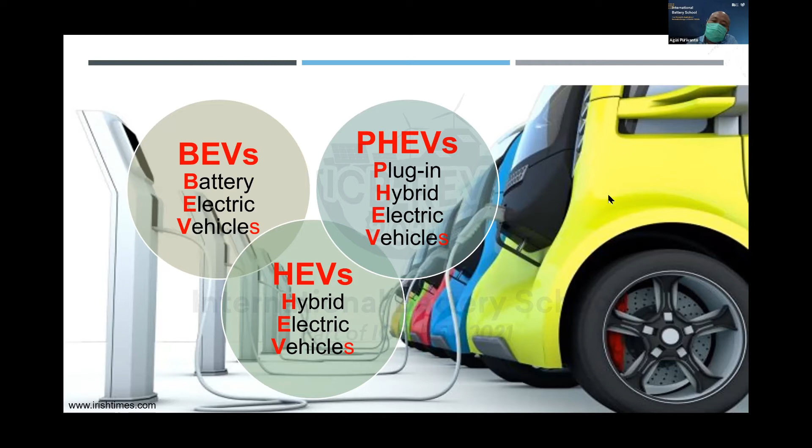So the battery is becoming more and more important in recent years. Batteries used in electric vehicles are not just one cell, but comprise many cells connected in series or parallel to the designated voltage and current, to provide energy used to move the electric vehicle.

Here I've shown the example of the BYD car, which uses lithium iron phosphate battery cells with a capacity of around 53 kilowatt hours. This 53 kilowatt hour lithium-ion battery, lithium iron phosphate pack, comprises many cells connected in series or parallel. In this system, it is divided into four modules, and each module is then connected in series to give the designed voltage.

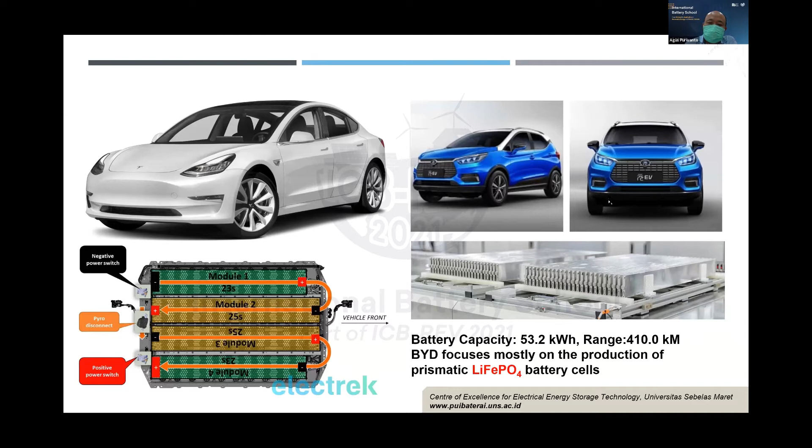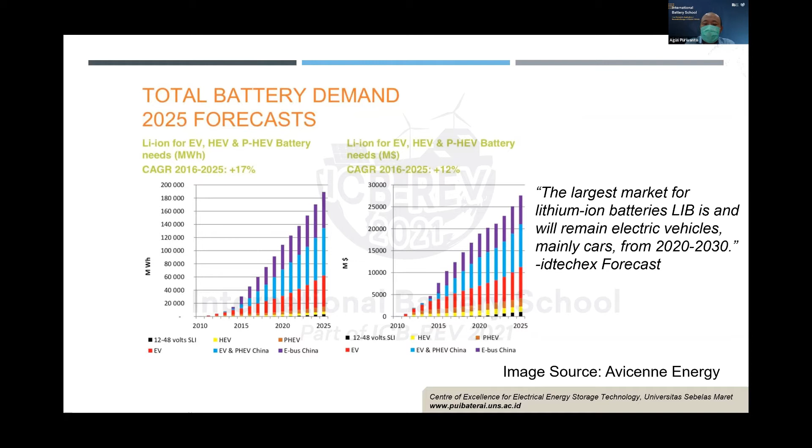As forecasted, the demand for electric vehicles is increasing year to year, and in 2025 the demand for batteries is predicted to be 180,000 megawatt hours, and it's forecasted that lithium-ion batteries will be mainly used in electric vehicles. So from this point of view, the knowledge of electric vehicles becomes more and more important in the coming years, because of the massive application of electric vehicles in our daily life.

So from the point of view of the manufacturing system, electric vehicle battery, lithium-ion battery comes from raw material mining. If we use NMC, the main minerals are nickel, manganese, and cobalt, and of course lithium itself. So from the material, it's produced into active material, and then becomes battery cell manufacturing. Then from battery cell manufacturing, it will be assembled into a battery pack.

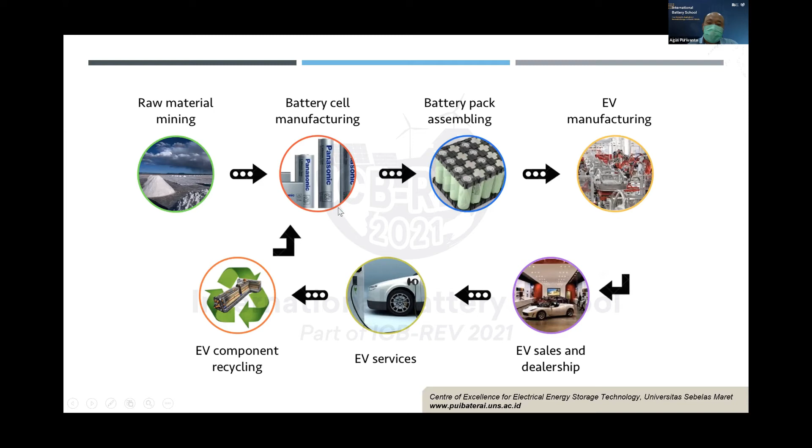And then from the battery pack, it comes to EV manufacturing, then continues to the sales, and also service and component recycling. My focus in this talk is battery cell manufacturing. Here, I would like to talk about active material processing, because to make a good cell or to produce a battery cell, it is better to create our own cathode material or our own active material.

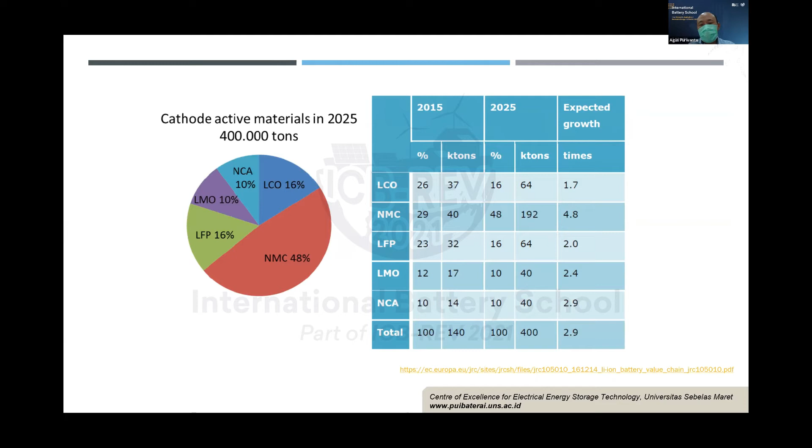Here, we found that the prediction of active material for 2025 is around 400,000 tons, which is mainly NMC material. So from the forecast, NMC material will be the dominant cathode material in the near future.

From the point of view of research relating to manufacturing, of course, we want to produce low cost lithium ion batteries. To make a low cost lithium ion battery, we must produce cells with the highest performance. It means for cell production, we must prepare cells with the highest energy storage capacity, or for another purpose, batteries with the highest power ability. So by making a high performance battery, the price per kilowatt hour of energy storage will be reduced.

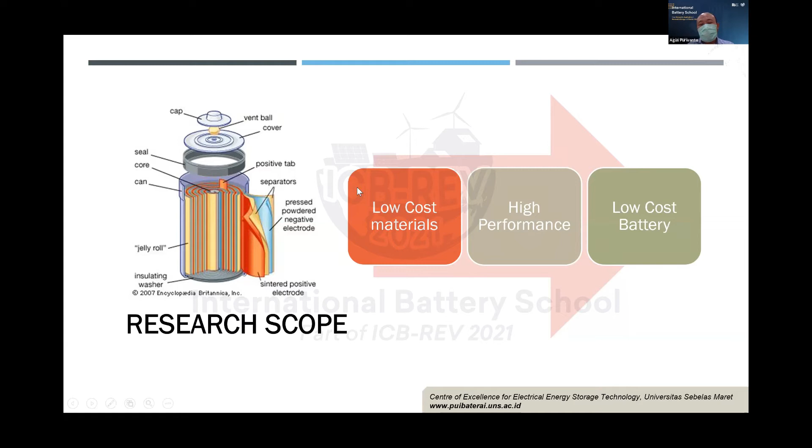Another strategy is to make low cost material, of course. Here I want to talk about the development of low cost active material. To make a low cost active material, it is better to use technical grade material. As researchers, we routinely make cathode material, but in our laboratory research we always use high purity chemicals. Of course, using high purity chemicals, the active material will have good performance and good characteristics. But from the industrial point of view, it is not feasible for commercial use.

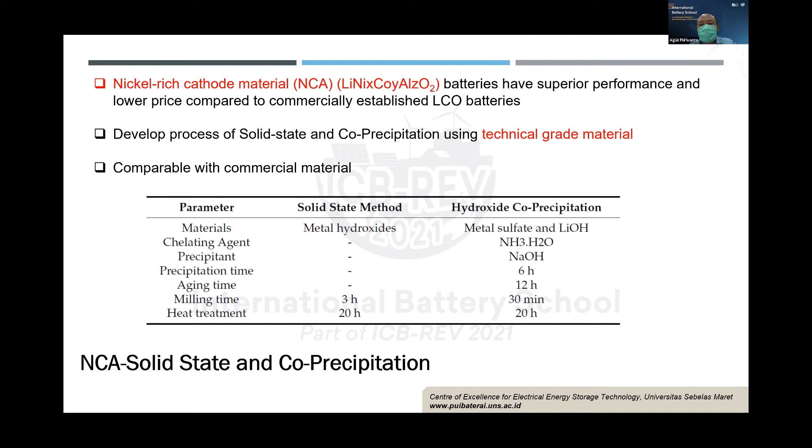We can also tune the material morphology by tuning the process. And from the comparison of the process development, we show here that our development process can produce NCA cathode powder close to the commercial one. So here I want to show that process development is also significant to improve the quality of the cell and to reduce the battery price.

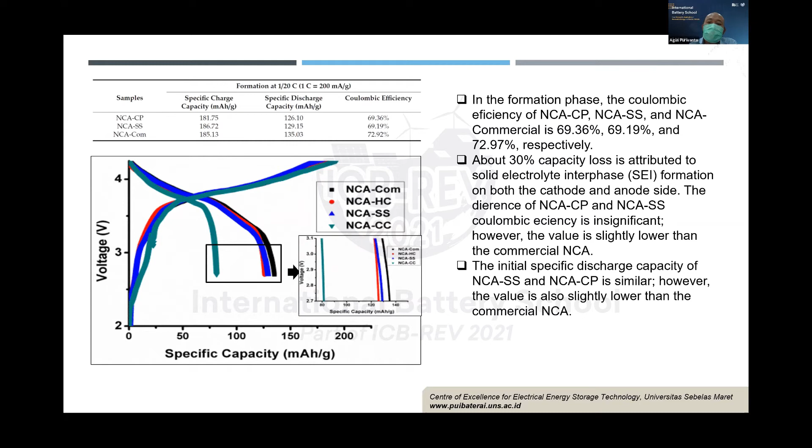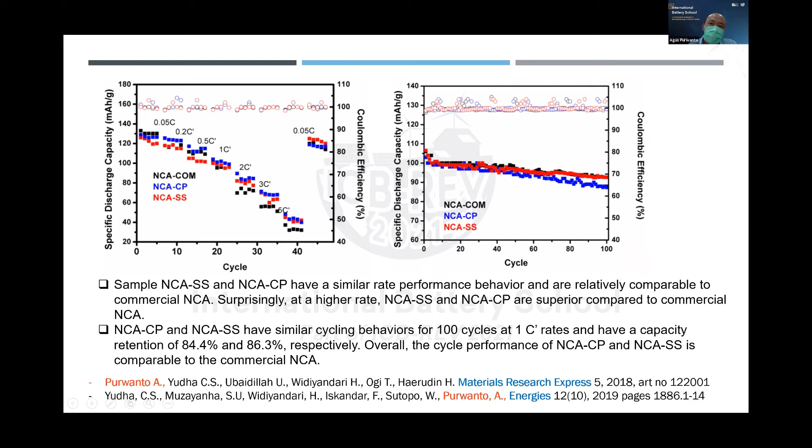And not only crystal characteristics, we also evaluate electrochemical characteristics. Of course, we want to make a battery with good power capacity and good lifetime. So here we also show that our development process can make NCA material with the ability to be discharged at high current, and reliability for use over a long time period.

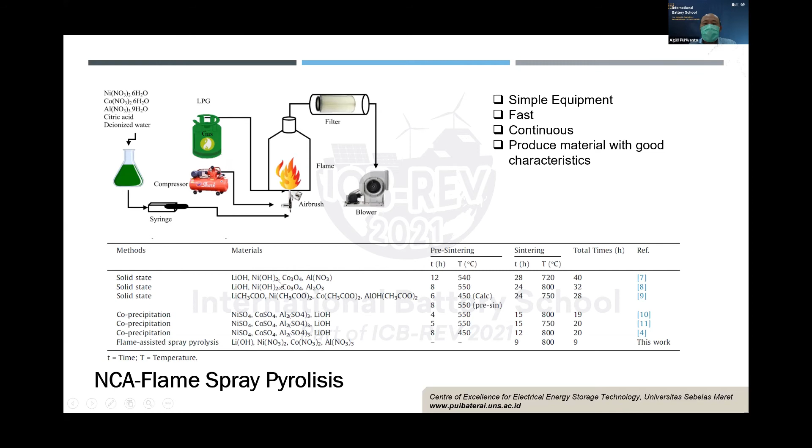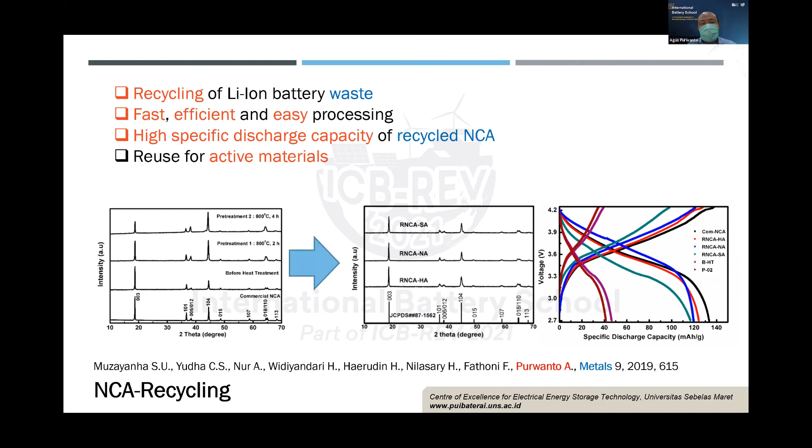In another process to make low cost material, we can also use waste products from lithium ion batteries. We recycle this waste as a precursor to make cathode active material. Here we also try to develop a process to make NMC material, because from the forecasting, NMC will become the dominant material in the near future. We also try to develop NMC material from technical grade material.

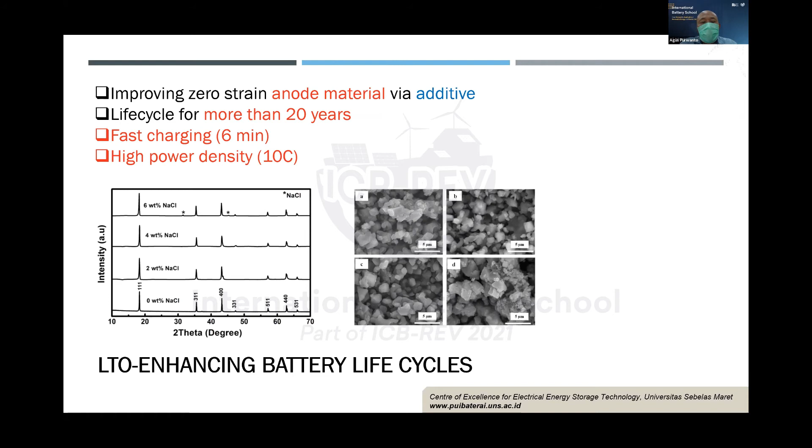Also, a battery with a long lifetime is important to reduce the price of the battery itself. So here we also evaluate LTO anode material with a cycle life of more than 20 years. This is very interesting because for residential or stationary use, this battery will be very important, because it can serve more than 20 years, and it can also be used for fast charging and high power applications.

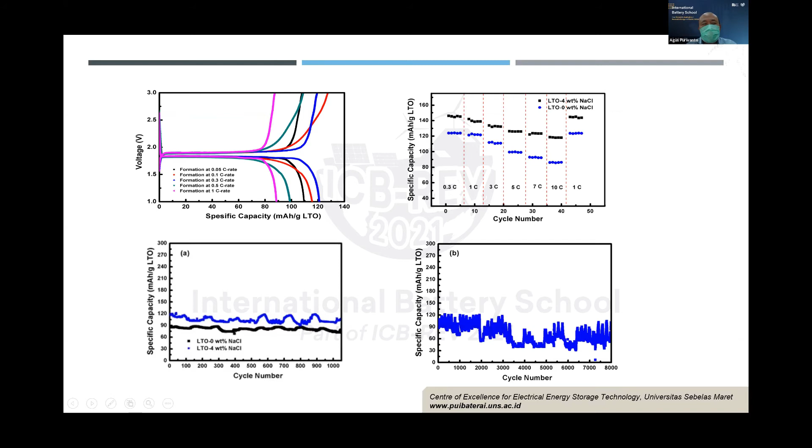The drawback of the use of LTO material is the energy density is low. Here is an LTO battery using LFP as cathode material, with a specific capacity of around 100 mAh per gram. But this kind of anode material gives good characteristics in terms of discharge rate and also in terms of lifetime. So in the next discussion, I will discuss lithium-ion battery assembly.

Then to make a good size distribution of the material, we use milling and then a mixing process to mix all ingredients or chemicals used in the cathode or the anode material, and then we coat the slurry and use a rolling press to reduce the thickness of the electrode. From here we come to the slitting machine.

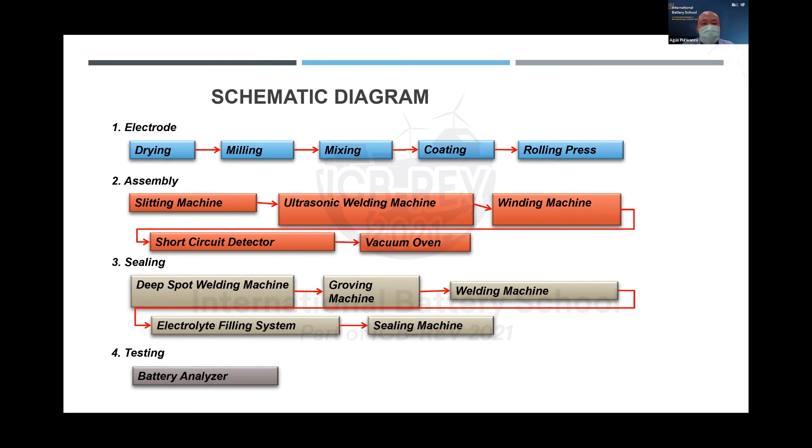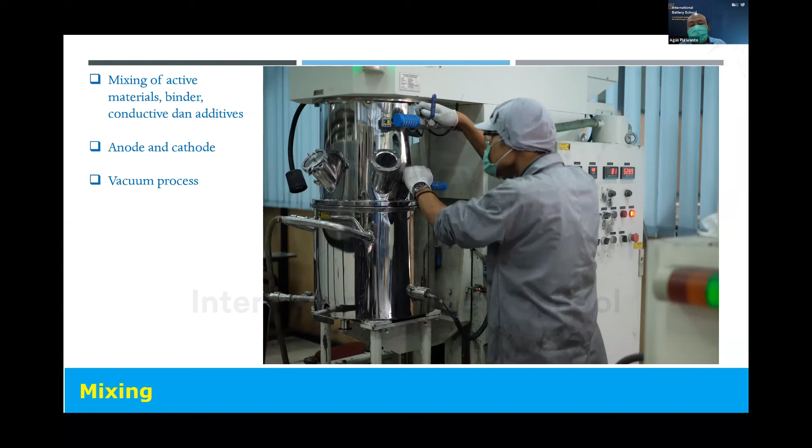Here, the mixing process is used for the anode and also the cathode, and the important thing in the mixing process is using vacuum to ensure there is no bubble inside the slurry, because if there is a bubble inside the slurry, the film will not have good density, and maybe morphology. Then after the slurry is ready from the mixing process, we move to the coating process.

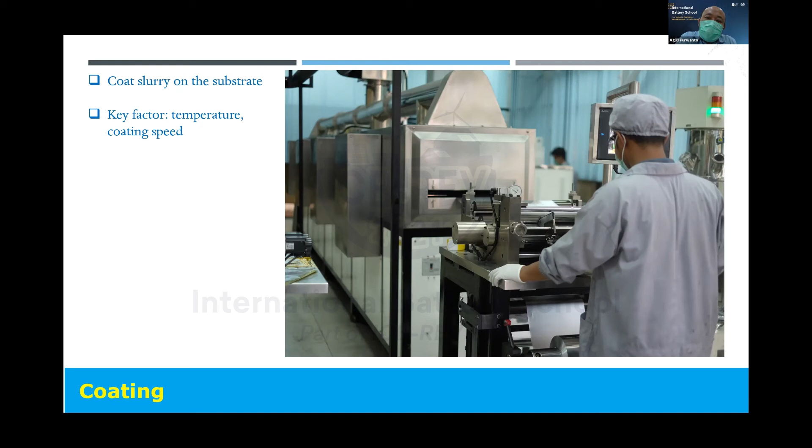The coating process coats the slurry onto the substrate. Here we usually use aluminum for the cathode, and copper foil as the anode substrate. The key factors in this process are the temperature and the coating speed. We must make trials, depending on the slurry, for what temperature to set in this machine to make a good coating of active material on the substrate. If the temperature and coating speed are not set in good condition, the coated active material will crack and may easily disintegrate from the substrate.

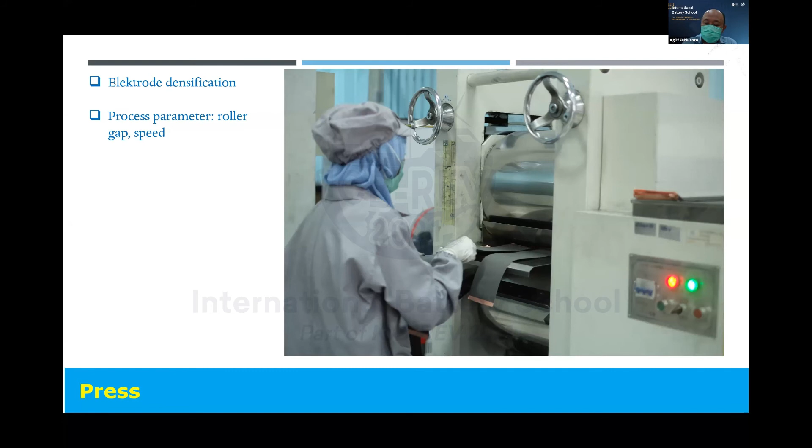After that, we come to electrode densification, which uses a pressing machine. The parameters of this process are roller gap and speed. Electrode densification is important to control the performance of the lithium-ion battery. Here I show that different densification will produce batteries with different internal resistance. Internal resistance is one parameter of the lithium-ion battery which affects the overall performance of the battery.

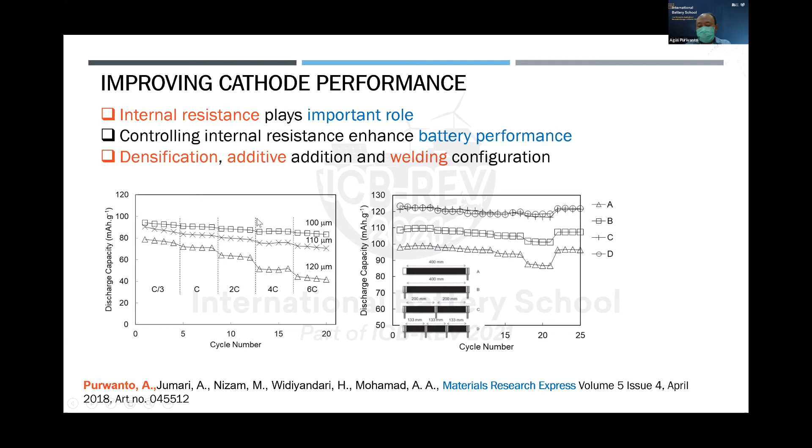After the densification process, we move to the welding process, the weld between the electrode and the tab. This is not a big concern, but the important thing in this process is we must ensure that the process is done in clean conditions, because any debris or any tape will affect the cell battery performance in the final product.

After the tab welding process, we move to the winding of the electrode. The winding of the electrode will wind the anode and cathode into the cylindrical form of the battery. In this process, we must pay attention to the winding speed and also the cleanness of the device, because any debris will affect the overall performance of the battery.

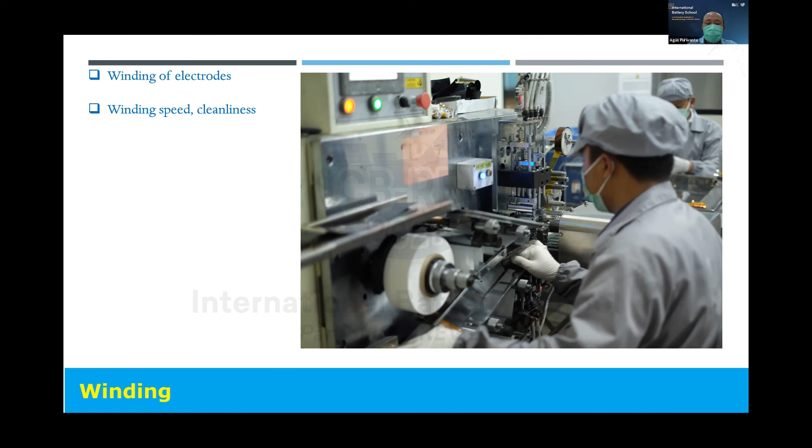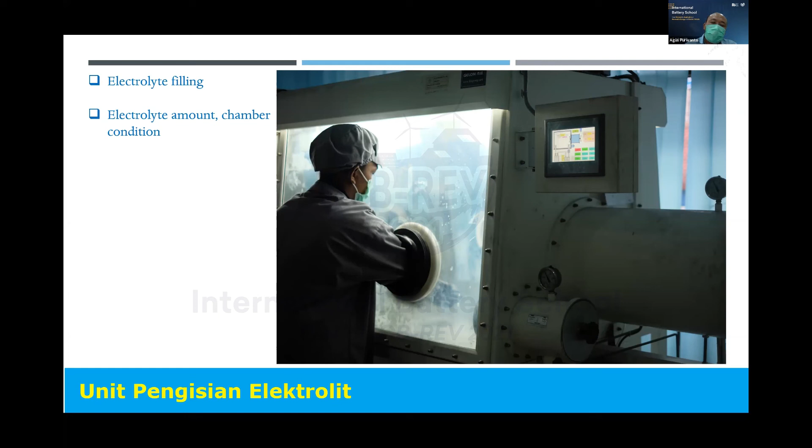After that, we move to the electrolyte filling. In the electrolyte filling, we must pay attention to the electrolyte amount and also the chamber condition. A chamber with no leak, very low oxygen content and very low moisture content will produce a battery with good characteristics. But we must also focus on the electrolyte amount. If we fill the electrolyte too much, there will be some leaking of electrolyte after the final process, and it will affect the corrosion of the battery.

After this process is all done, we move to the formation and grading. The formation and grading is used to activate the lithium-ion battery for the first time. In the formation process, the most important thing is we must set the formation process with good setting parameters in terms of current and also voltage. There are many schemes of formation setting, but we can optimize the formation setting by trying the setting on different types of lithium-ion battery.

The main concern here is that formation usually needs a long time. From the research point of view, it is good to have a formation process with a shorter time, so it will affect the overall manufacturing process of the battery.

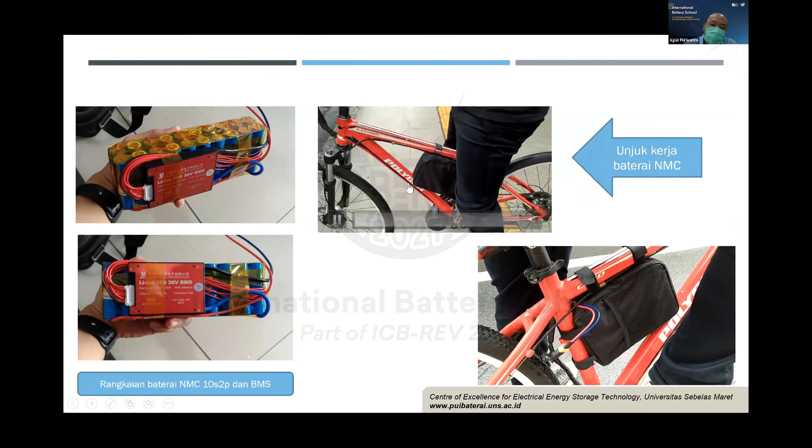Here, I will show a small application of our product. Here is an electric bike, so we can use this battery cell for an electric bike. This is the NMC battery for electric bike. Previously it was an LFP battery, and here we also develop an NMC battery for electric bike. And then we can use the battery for an electric motorcycle. This is the test data, and we can also use it for other applications.

Before I close this presentation, I will make a small introduction to our Center of Excellence for Electrical Energy Storage Technology. If you want to study in detail on this battery production, you can contact us, and then we can have some discussion and maybe some cooperation on battery development. This is our PUI PT TPEL, called Teknologi Penyimpan Energi Listrik. We are located in Purwosari, Jalan Slamet Riyadi in Solo.

This center has a main building that consists of 3 floors, and we have all the equipment inside there: the mini plant for battery production, and also a place to make active material. We also develop active material to be used for our pilot plant. We also have several testing apparatus such as a charge-discharge battery analyzer, XRD, AES and SEM, FTIR, etc. We have devices related to material characterization and battery characterization.

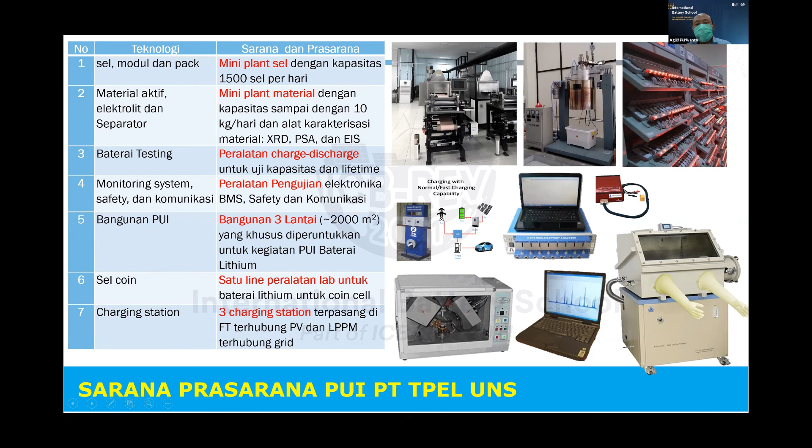If you are a university student and you are interested in joining Merdeka Belajar, Kampus Merdeka, you can join us in the research program for 1 or 2 semesters, which equals 20 or 40 credits of curriculum. If you join for 1 semester, at least you will have a scientific report, and maybe the possibility of intellectual property rights. If you join for 2 semesters, you will gain much experience, including at least submitting a paper to a reputable international journal.